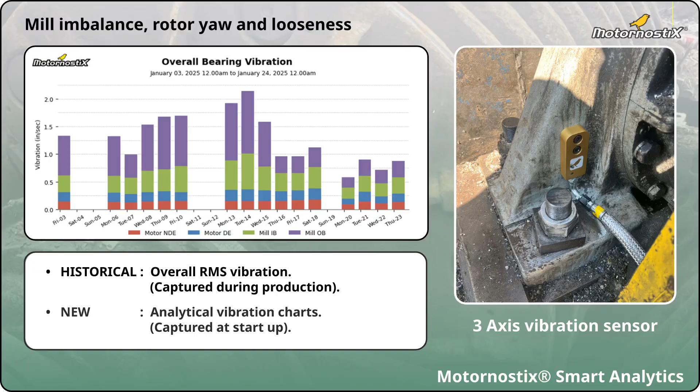The benefits of these new charts will assist with effectively balancing your rotor, which will in turn reduce vibration on the mill, reduce rotor yaw, as well as indicate when to tighten mill bearing bolts.

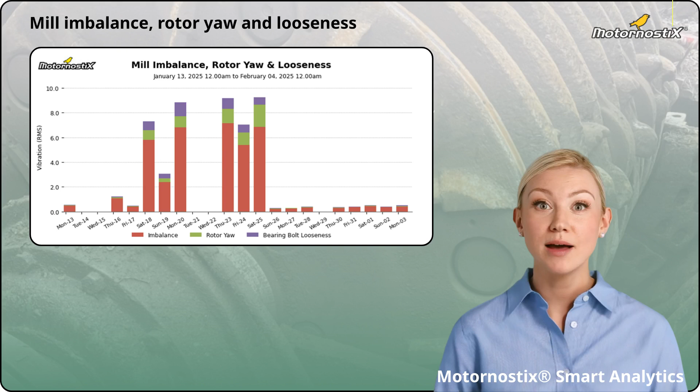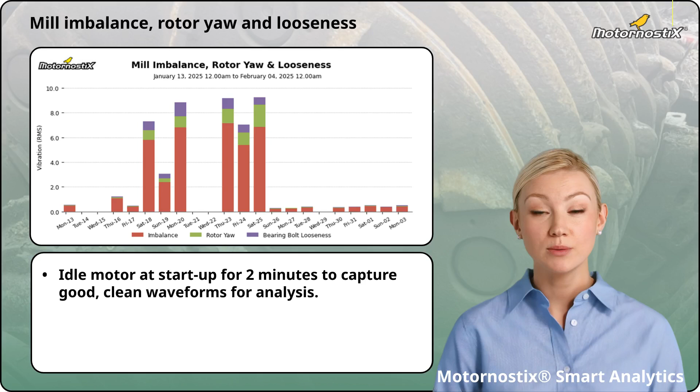Vibration waveforms are captured while the motor is idling and the mill is empty. We require site to idle their motor for 2 minutes, once the motor is up to speed and before the mill is loaded with scrap. This will ensure we capture good, clean waveforms to analyze. Scrap, hammer impacts, or rubs within the mill will pollute the waveforms, resulting in them being discarded.

The waveforms we capture at startup are broken up into their numerous harmonic components. Each harmonic component helps identify an existing or emerging problem. Using simple to understand bar charts, we will make this information available in daily reports.

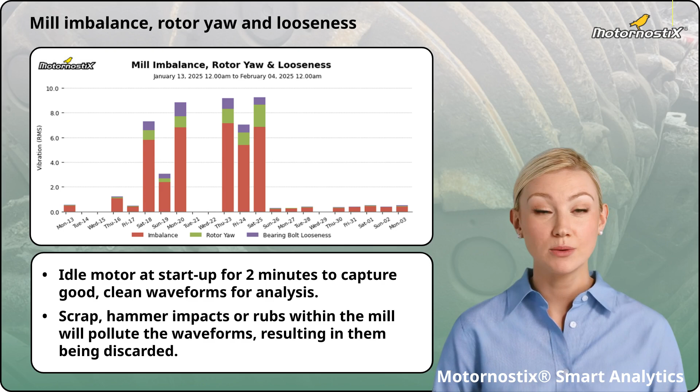The first of these charts show the overall vibration energy measured on both the mill inboard and outboard bearings over the last 21 days. This vibration energy is then broken down into 3 distinct components, these being mill imbalance, depicted by a red bar, rotor yaw depicted by a stacked green bar, and mill bearing bolt looseness, depicted by a stacked purple bar. The easiest way to interpret these charts is, large bar amplitudes are bad and small bar amplitudes are good.

Rotor yaw is when the rotor wobbles due to dynamic imbalance across the rotor. Rotor yaw will increase when imbalance on one side of the rotor is diametrically opposite to the imbalance on the other side of the rotor. High rotor yaw is bad, low rotor yaw is good. If the rotor is well balanced, there should be little to no rotor yaw.

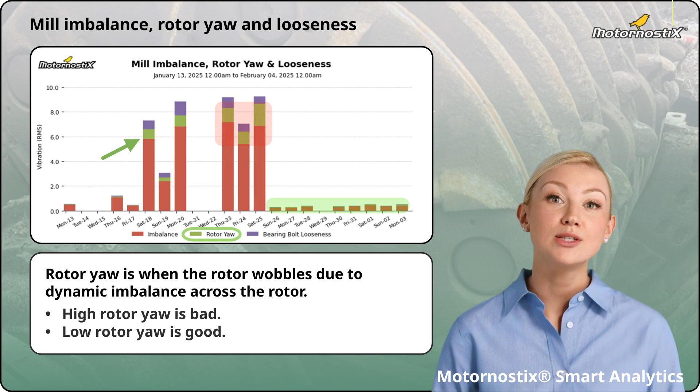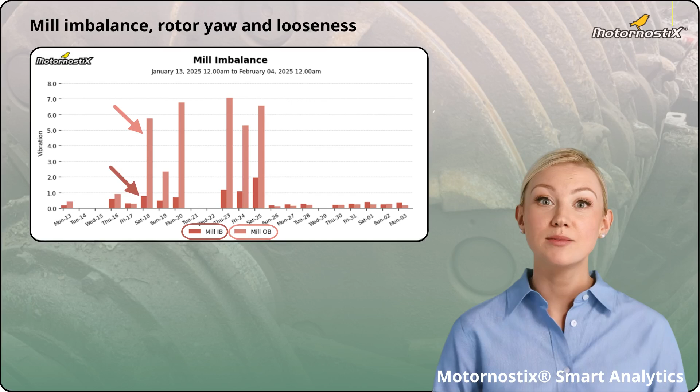The second chart focuses on mill imbalance and separates out the amount of rotor imbalance on the inboard side of the mill, depicted by a red bar, versus the amount of rotor imbalance on the outboard side of the mill, depicted by a lighter shaded red bar. In summary, large bar amplitudes are bad and small bar amplitudes are good.

If both red bars are high, it's an indication that the rotor is out of balance on both the inboard and outboard side of the mill. If either the red or lighter red bar is high and the other is low, then the side on which the bar is high needs to be better balanced. In summary, the higher the bar, the more out of balance the rotor is, the smaller the bar, the more balanced the rotor is.

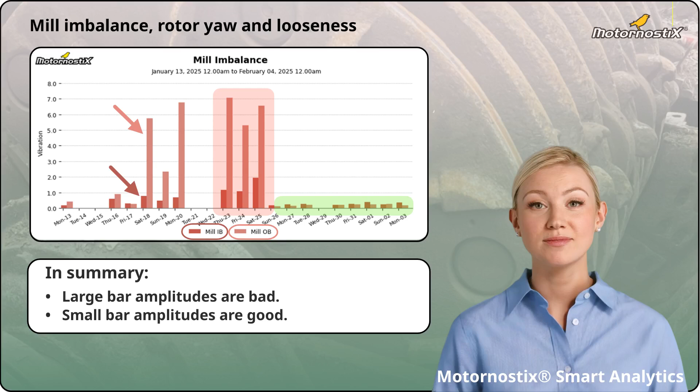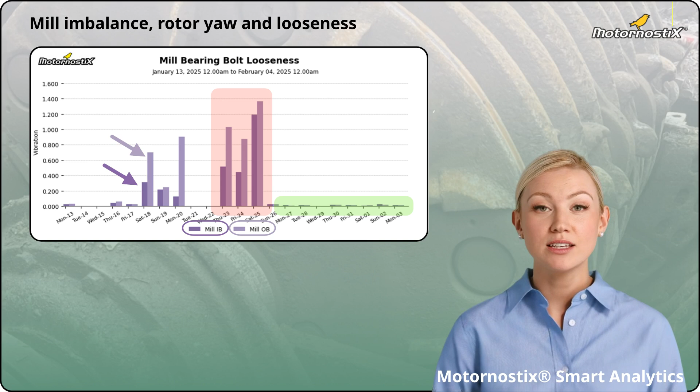In conclusion, it is important to keep the rotor well balanced and bearing bolts tight, as this will reduce overall vibration on the mill and on the motor. Motor bearing vibration is influenced by and sympathetic to mill vibration. As a general rule, high vibration levels will more than likely shorten the lifespan of a bearing.

Additional motor and bearing analytical health related charts will follow in the coming weeks and months. In part 2 of these training sessions, we will show the impact of high mill vibration on the motor drive end and non-drive end bearing.